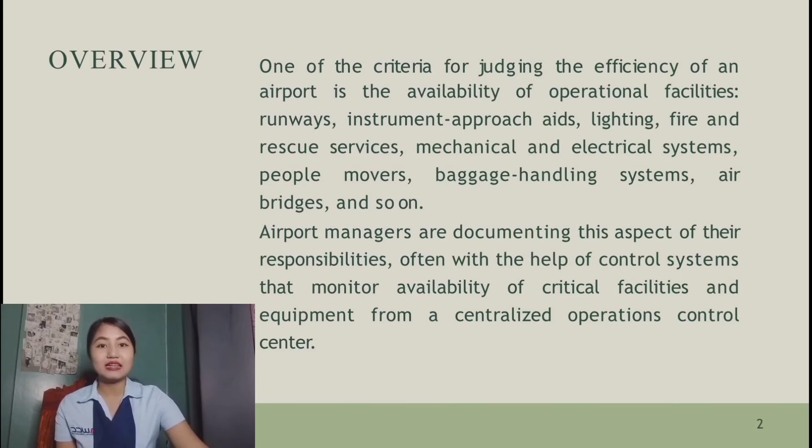In short, readiness is the state of the airport to provide the operational facilities appropriate to the types of airlines and aircraft using the airport. All of this involves a considerable commitment to maintenance on the part of airport management.

Aerodrome certification. The principle of central government responsibility for safety aspects of public transportation extends to the licensing of airports. The International Civil Aviation Organization, or ICAO, uses the term aerodrome certificate and requires that all member states put in place a system for granting certification for airports with international commercial service. So the ICAO Manual on Certification of Aerodromes, ICAO 2001, lists the obligations of the airport's operators and provides a guide on how to document compliance in the form of an approved certification manual.

In common with most ICAO member states, the United States makes certification compulsory for airports used by air carriers, both scheduled and charter. In Great Britain, the Civil Aviation Authority, or CAA, requires in addition that any airport being used for flight training also must be licensed. The CAA issues two classes of license, public use and ordinary. So the essential difference between them is that a public use airport must be available to all would-be operators without discrimination, whereas the ordinary category may be restricted if the owner so desires.

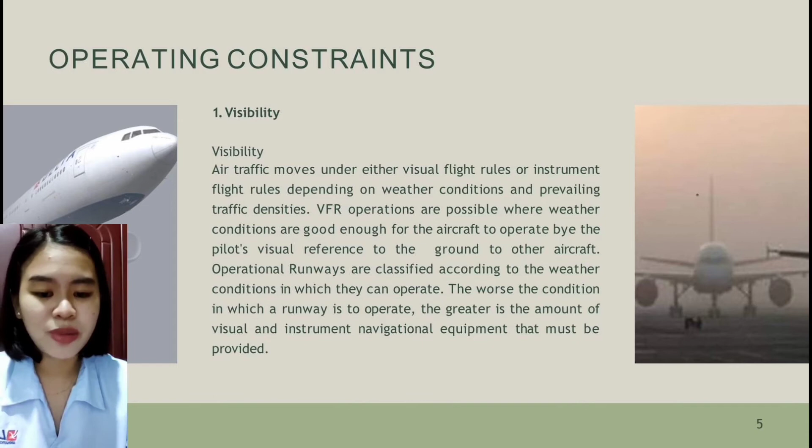Operational runways are also categorized. The more visual and instrument navigational equipment that must be provided, the worse the conditions that a runway must operate in. Runways can be classified according to their ability to accept aircraft at different degrees of visibility, namely, non-instrument runway, instrument approach runway, precision approach runway category 1, precision approach runway category 2, precision approach runway category 3, category 3A, category 3B, category 3C.

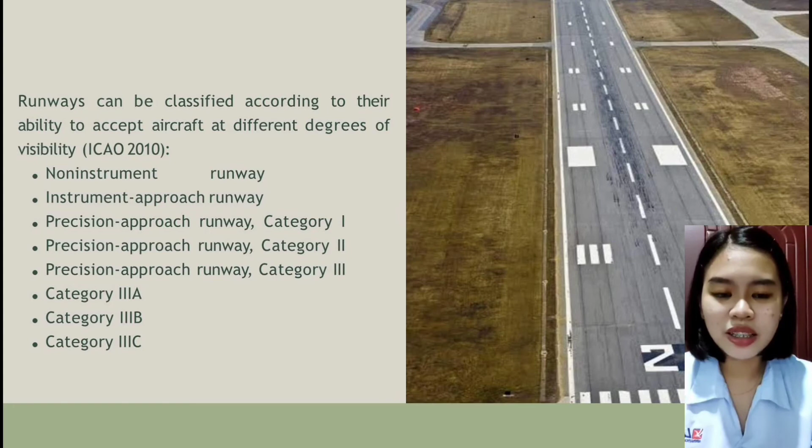Non-instrument runway. This is a runway intended for the operation of aircraft using visual approach procedures only. Instrument approach runway. This is a runway served by visual aids and a non-visual aid providing at least directional guidance for a straight-in approach. Precision Approach Runway Category 1. This is an instrument runway served by an instrument landing system and visual aids intended for operations down to a decision height of 200 feet and visibility of no less than 2,600 feet or a runway visual range of 1,800 feet.

Precision Approach Runway Category 2. This is an instrument runway served by ILS and visual aids intended for use in operations down to a decision height of 100 feet and an RVR of 1,200 feet. Precision Approach Runway Category 3. This is an instrument runway served by ILS to and along the runway, with further subcategories. Category 3A. This is intended for operations down to an RVR of 700 feet and a zero decision height using visual aids during the final phase of landing.

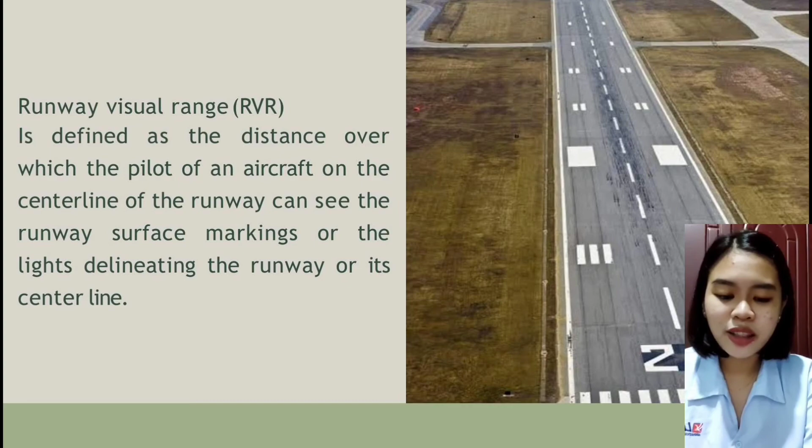Category 3B. This is intended for operations down to an RVR of 150 feet and zero decision height using visual aids for taxiing. Category 3C. This is intended for operations without reliance on visual reference for landing or taxiing.

So next is bird strike control. Since the beginning of aviation, birds have been recognized as a hazard to aviation. In the early days, damages tended to be minor, such as cracked windshields, dented wing edges, and minor fuselage damage. Damage increased when turbine engine aircraft were introduced. Ingestion of birds into the engine can cause blocking or distortion of airflow into the engine, severe damage to the compressor or turbine, and uncontrollable loss of power.

Loss of life through bird strike may be unusual, but airport operators must be aware that the potential for disaster can exist in the vicinity of an airport, where aircraft are operating at the low altitudes at which they are likely to come in contact with birds. International and national aviation regulating bodies therefore have prepared advisory documents that guide airport operators in methods of reducing the risk of bird hazards through programs of bird strike control.

So here are some of the typical countermeasures on bird strike. Number one, control garbage, especially the location of garbage dumps near the airport. Garbage disposal dumps should not be located within 8 miles or 13 kilometers of an airport. Second is control of other food sources such as insects, earthworms, and small mammals by a variety of measures such as poisons, insecticides, cultivation, and hunting to ensure that the open space near the airport does not encourage a food supply likely to be attractive to troublesome species.

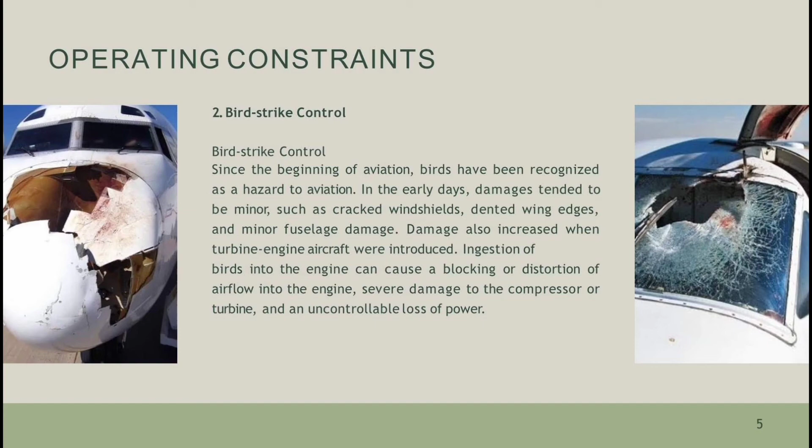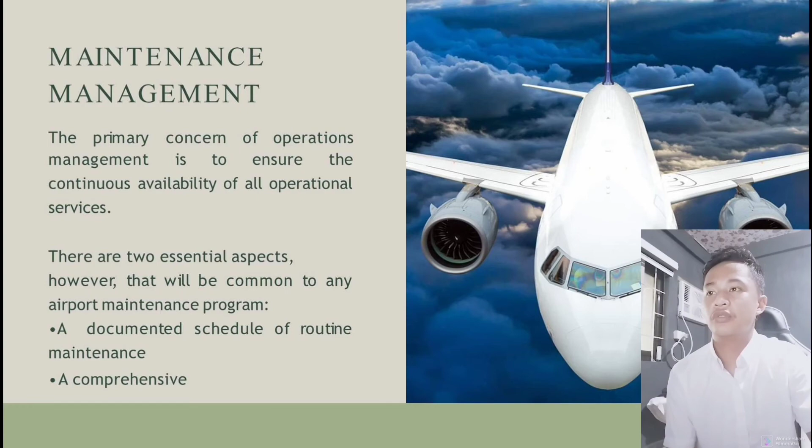Maintenance readiness. Maintenance management. The primary concern of operations management is to ensure the continuous availability of all operational services. There are two essential aspects, however, that will be common to any airport maintenance program. A documented schedule of routine maintenance, basically a checklist for maintenance checks. The second is the same as the first but includes the facilities and equipment, with changes to be recorded.

Preventive maintenance. The process of preventive maintenance is concerned mainly with regular inspection of a system and all the component parts with the objective of detecting anything likely to lead to a component or system failure and taking appropriate action to prevent it happening. Preventive maintenance is the regular and routine maintenance of equipment in order to keep them running and prevent any unexpected equipment failure.

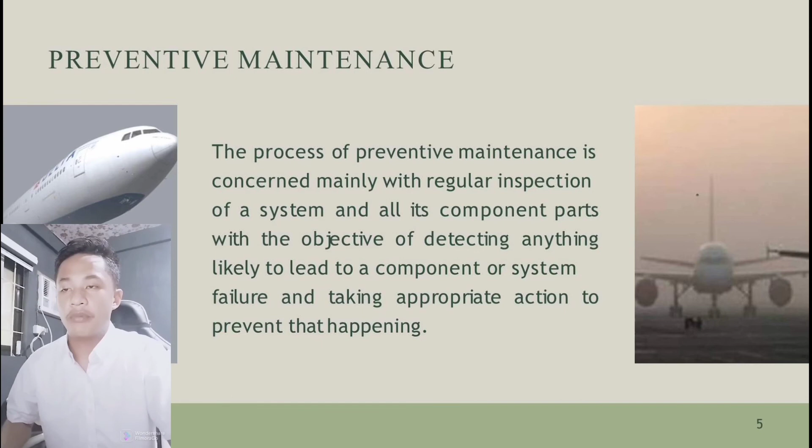Electrical maintenance. There are few systems of an airport that do not depend in one way or another on electrical power. Indeed, the power requirements of modern airports are equal to those of small towns. As part of the public transportation industry, the aviation industry is heavily invested in public interest and safety is always a major concern. Accidents, whether caused by human or machine mistakes, can be costly in terms of life lost. That is why electrical safety is important in the aviation sector, and performing regular electrical maintenance checks is one approach to protect against electrical risks and dangers.

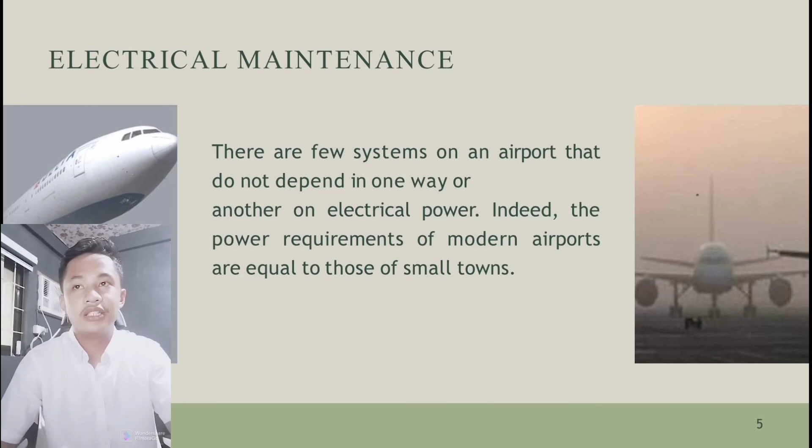Next is operational readiness, aircraft rescue and firefighting. There is one essential element of the operating system, the Rescue and Firefighting Service or the RFFS, where maintaining readiness applies as much to personnel as to machines. Operational readiness can be defined as the capability to efficiently deploy, operate, and maintain the systems and procedures to reduce operational risk. Operational readiness is the process to ensure that the operations team is prepared for the new responsibility and is set up for the best chance of success for continued operation and maintenance of the new equipment.

What is aircraft rescue and firefighting? It is a type of firefighting that involves the emergency response, mitigation, evacuation, and rescue of passengers and crew of aircraft involved in aviation accidents and incidents.

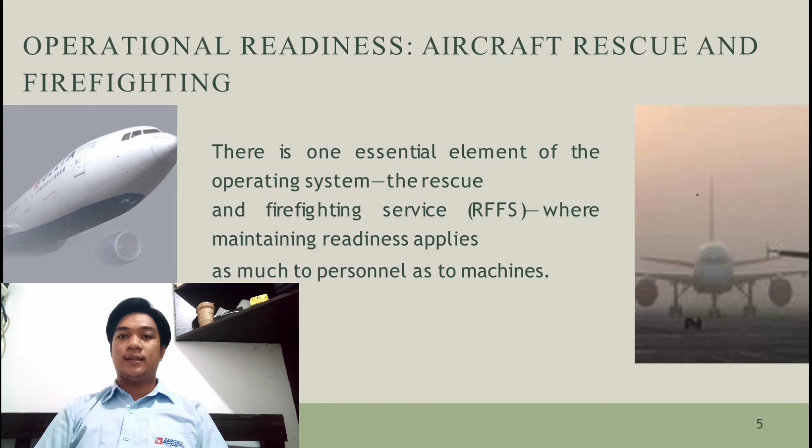Next is safety aspects. Whether maintaining electrical or mechanical systems, the nature of maintenance work exposes those who carry it out to certain risks, including natural phenomena such as lightning strikes while working out on the airfield. Safety is a state in which hazards and conditions leading to physical, psychological, or material harm are controlled in order to preserve the health and well-being of individuals and the community. It is an essential resource for everyday life, needed by individuals and communities to realize their aspirations.

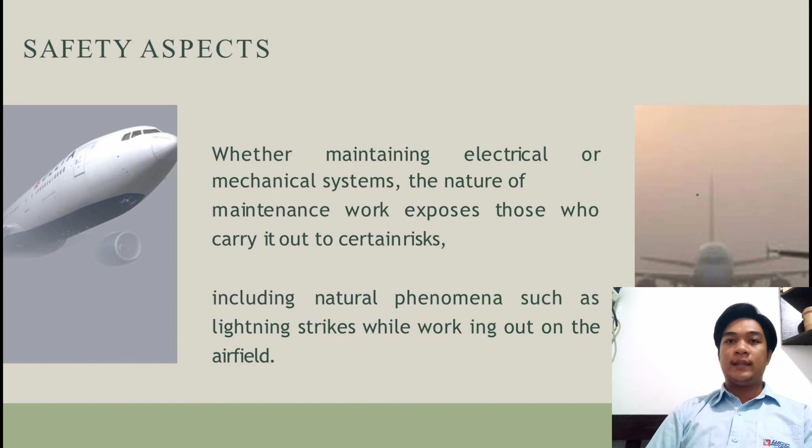The nature of these risks can be indicated by an examination of some of the common causes of accidents. These are working on equipment without adequate coordination with equipment users, working on equipment without sufficient experience on that equipment, failure to follow instructions in equipment manuals, failure to follow safety precautions, using unsafe equipment, failure to use safety devices, working at unsafe speeds, and poor housekeeping of work areas.

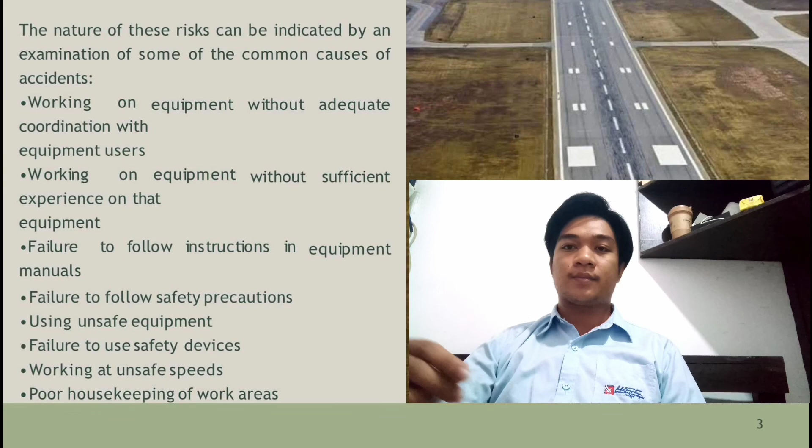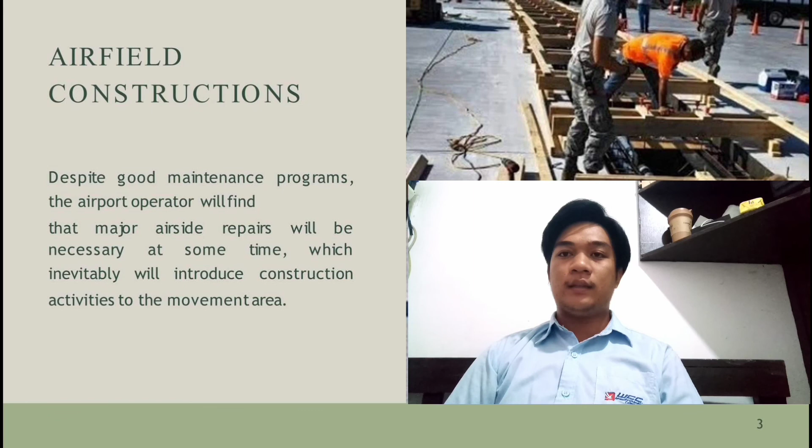And last is airfield construction. Despite good maintenance programs, the airport operator will find that major airside repairs will be necessary at some time, which inevitably will introduce construction activities to the movement area. Airport construction means the program of construction, reconstruction, expansion, relocation, maintenance, and repair of the various buildings, infrastructure, and facilities on the airport.